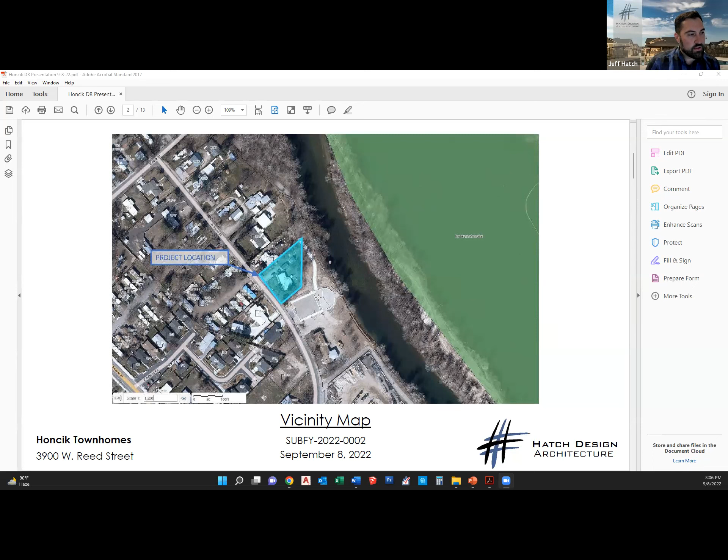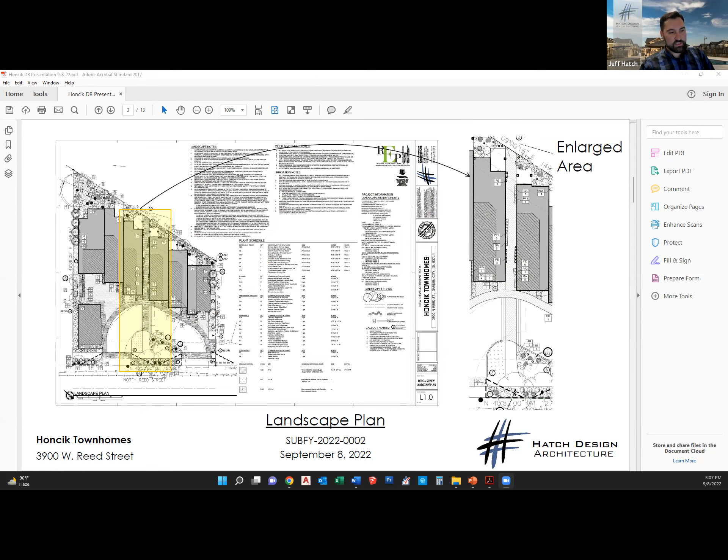So we have the orientation next to the public park, we have the river frontage. Looking at our revised landscaping plan, we have enhanced this walkway, adding planters and buffers along the way to help encourage pedestrian activity towards that space, as well as enhancing some of the amenities at this location, our common area.

So you can see that slightly enlarged here. In that location, what I was just recapping was, we actually look at connectivity to the existing sidewalk of the park. That location is interrupted by a range of different utilities, from electrical to emergency services and other meters, a power pole. So to be able to connect that sidewalk, there are some very valid reasons why the city didn't put in that public sidewalk at that location.

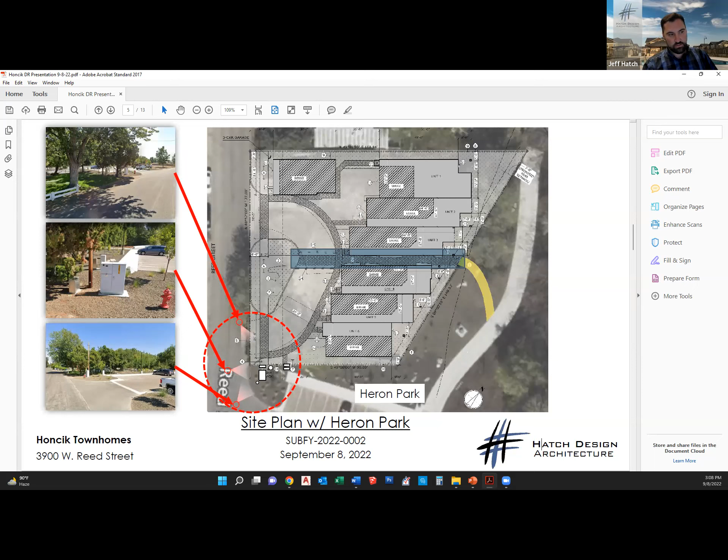So if we look at, okay, how are we going to connect this sidewalk into the park? If we go a little further south, where we have our public bike parking and some bike parking here, we still have additional meters over there. So we're actually pushed even further into the site, which led us to think, if we're having to engage the site halfway through anyway, in order to engage people with the park, the owner felt it was prudent to adjust the site layout, accentuating and centralizing it to the center of the development, creating a focused, intentional access to Greenbelt, and also for the general public to enjoy that parkway.

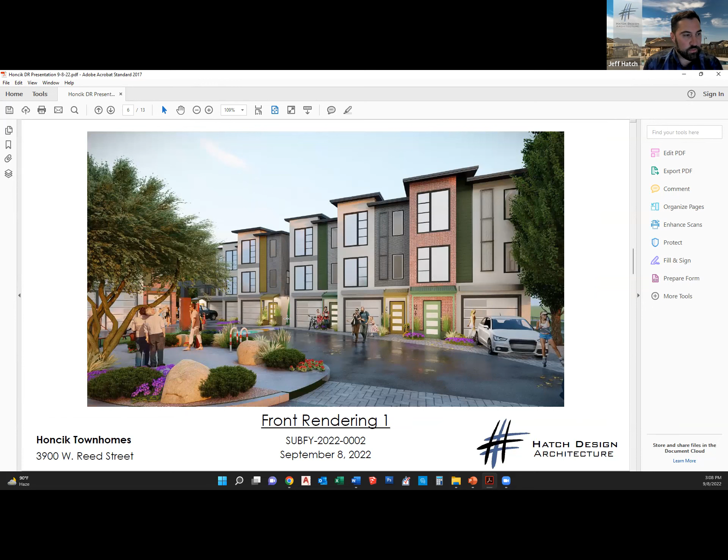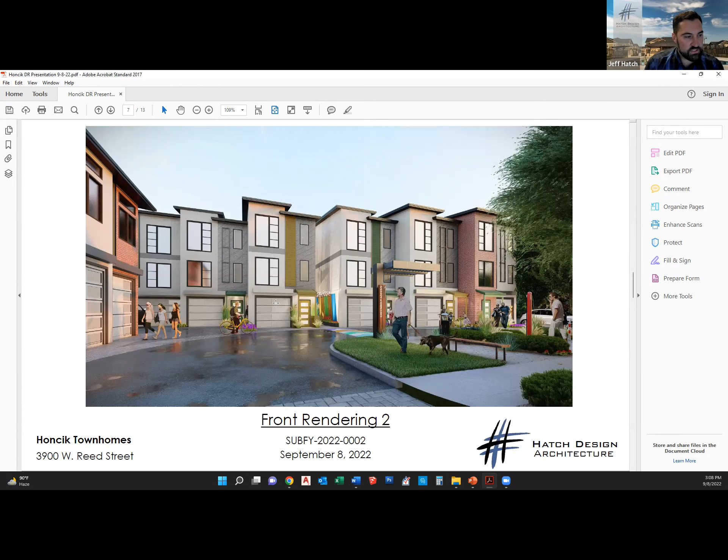So looking at some of the enhancements we've done to help encourage and engage that, we've added a pedestrian access signage with an entry arbor, which calls attention and engages individuals into understanding that yes, this is a public access, this is intentional, this is the way to go. You don't need to walk through the utility meter box tree forest to try to get to the sidewalk. We've engaged and made this much more functional, purposeful access to Greenbelt.

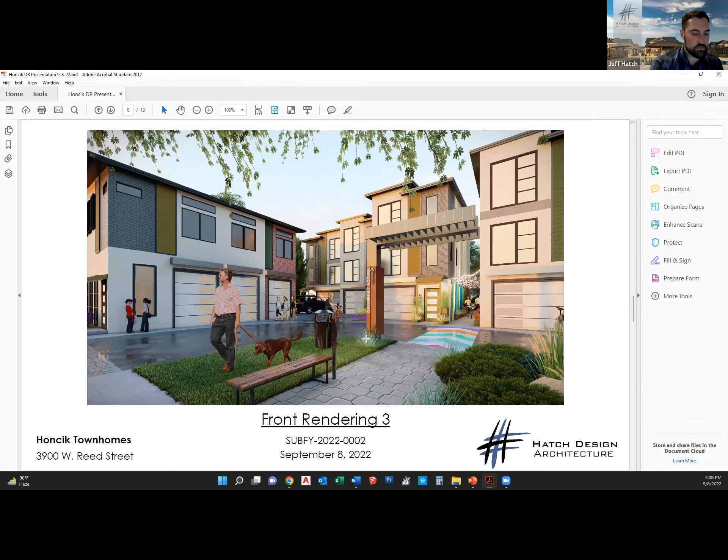And then with that, we've added a little bit of our artistic intention of directing people to go that way again, to try to engage and make it intentionally inviting for people to clearly be able to get there. So here's a screenshot looking through, seeing that space, walking through to the green belt.

And then, based on the staff report, we just wanted to speak to a couple of different comments and considerations. There was a comment about units greater than 30 feet in height needing aerial apparatus. In talking with the fire department, we did widen our walkway to the 26 feet needed for the aerial apparatus. We would also be proposing fire suppression, which also alleviates some of their concerns.

There's a consideration of some of the curb widths needing to be reduced in size, and the annotation for the final plat. We're fine with that condition of approval. Here's just our follow-up with the fire department acknowledging that they're okay with suppression in that.

So this is a reiteration from our previous coordination. There are some considerations for the preliminary plat as far as labeling and also dimensional tolerances, which we would be in agreement with those conditions of approval. And then indication of the bike parking, which I previously spoke to, is the keynote.

Some of the vegetation needs to be clarified, which is now in these renderings. There was a site deficiency in enclosed parking, which has now been revised since we had no carports on the site at this time. There were some questions as far as our tabulation for landscaping.

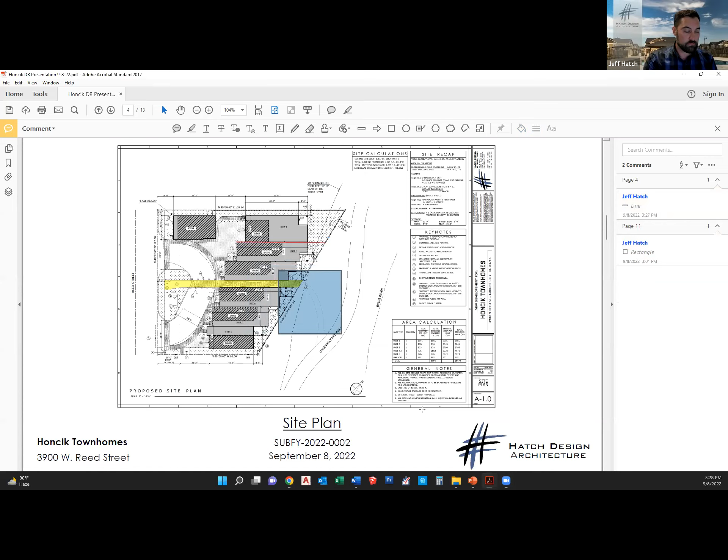Okay, thank you. And have you spoken with the adjacent property to verify that connection to the greenbelt could be granted? As far as this location, yes. At least our initial discussions with that entity were, after you have something finalized for approval, we can determine exactly how that looks for that access point. So it was favorable, but as far as a formal agreement, we wanted to make sure we all had general approved buy-in for this proposed solution. Then as a condition of approval, we would request that we formalize that.

It's a great comment, thank you. And then it's been brought up, the purposes of the planned unit development. I was hoping that you might be able to articulate how this application is meeting the purpose of the planned unit development for the waivers that are being requested.

I can help out if you need the code section, or I can generalize it. The purpose very generally states that the planned unit development is utilized to increase living choices, to preserve open space, to preserve items of note such as trees, vistas, etc., and to be in harmony with the comprehensive plan.

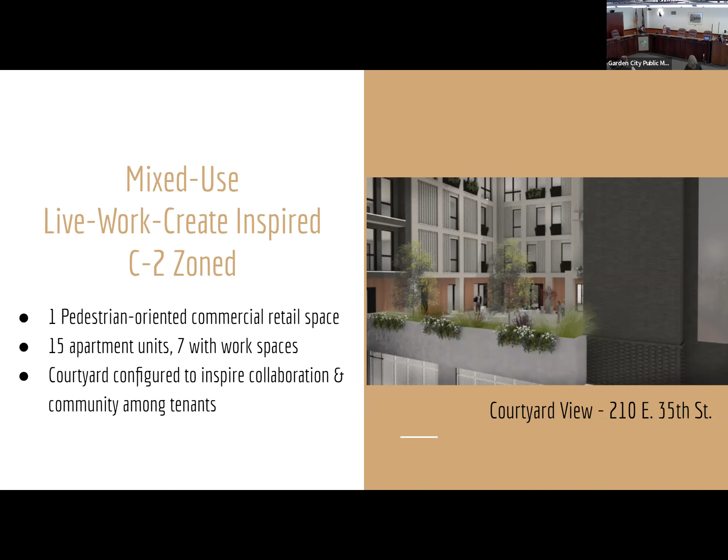It's also important for us to say at this point that Matthew and I are not outside developers just looking to maximize profits from this property for investors from afar, but this building will be our home. Our family of 4, plus a tiny, crazy, cute little dog, will live in one of the 15 apartment units. And we plan to use one of the courtyard level workspaces as our home office and art studio.

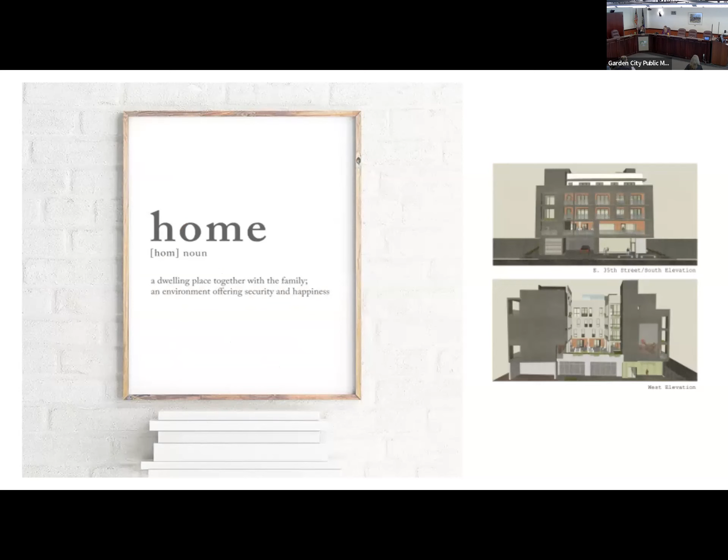A little over a year ago, we identified and purchased this property for a few primary reasons. We're very aligned with the stated intentions of this neighborhood, including growth, density, diversity of housing, and artful placemaking. We really believe in the creativity and sense of community fostered by the Live Work Create district. There's also no limit on building height, no limit on density, and no objective parking standards for mixed use projects. We saw this last item in particular as a selling point for our investment in the neighborhood and our commitment to making it our home.

We know that our community is growing quickly, and included in that growth are some people looking for ways to reduce their reliance on cars and looking to live with neighbors that share that intention. Both Matthew and I have lived without cars in other cities for many years, and very happily, and we're looking to create that possibility for ourselves and for others here at home.

Garden City and Boise City are working to revise their development code, including parking standards, to better accommodate healthy growth while also allowing for greater density. We understand that's a tricky process, but there are a number of new tools and proven ideas available to us to address parking in a modern mixed-use development.

So we've designed this mixed-use project to be fully compliant with Garden City Code and aligned with the comprehensive plan. We believe this fits beautifully within the larger stated vision of Garden City: a thriving, safe, and diverse community nestled by the river in the heart of the Treasure Valley. We are at heart community-focused neighbors and advocates of vibrant, creative, artistic communities. We really admire Garden City's ability to continually innovate and reinvent itself, and we're excited to become part of this neighborhood.

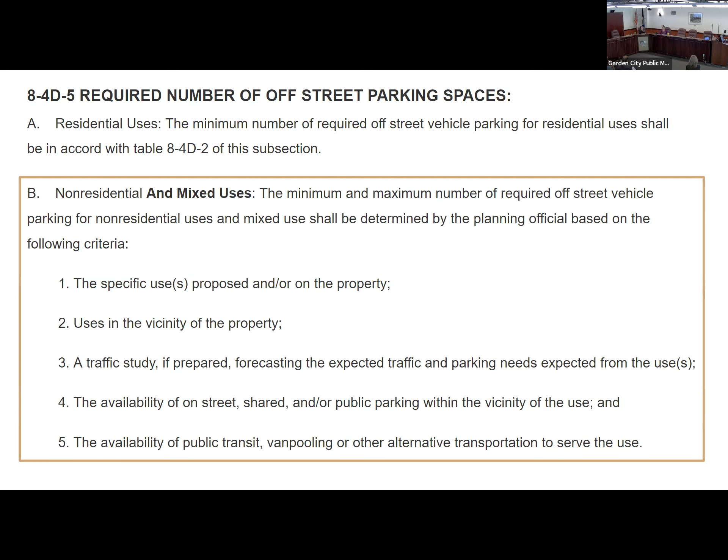Lastly, the availability of public transit, van pooling, or we think most importantly, other alternative transportation to serve the use. So in addition to the 17 covered parking spaces, the Sonder will be less than a quarter mile from a bus stop. We'll have at least 34 bike and scooter parking spaces, and we'll have this dedicated shared vehicle on site.

We understand that actual mixed-use development is relatively new to the area and that the car share program hasn't been seen here yet. But the Sonder justifies its parking plan under these subjective guidelines, while also addressing the standards for alternatives to on-site parking, including transit stop proximity, incentives, and shower facilities.

It's also worth mentioning that the staff report makes reference to a parking formula for commercial space that doesn't directly apply to mixed-use buildings, including live workspaces. But more importantly, we'd like to clarify that the workspaces at the courtyard level were designed for use by residents of the building, not people driving to the building, renting it just as their office from elsewhere.

The live-work overlay clearly states that no off-street parking is required for working spaces less than 500 square feet in interior floor area. So knowing that the parking requirement was subjective, but that there was an established metric, we designed our project to meet the standard of workspaces under 500 feet.

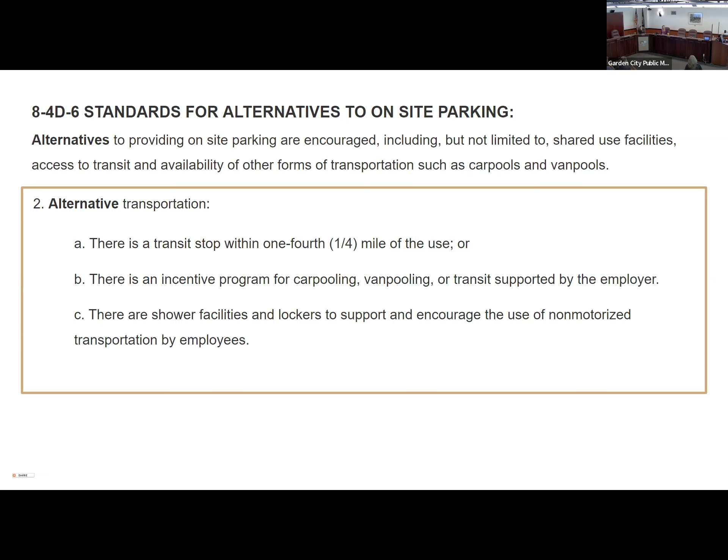Again, this project is a mixed-use building, not an exclusively residential structure. But for the sake of clarity, according to this definition, the small pedestrian-oriented retail space in our design is the main entrance. So we expect that even something like a coffee shop will see an average of more building users per day than the 15 apartments.

That said, in response to the comments we got from our pre-app meeting, we have designed the other two entrances, one for residents and one for occasional visitors to the courtyard level workspaces, to both be clear and inviting.

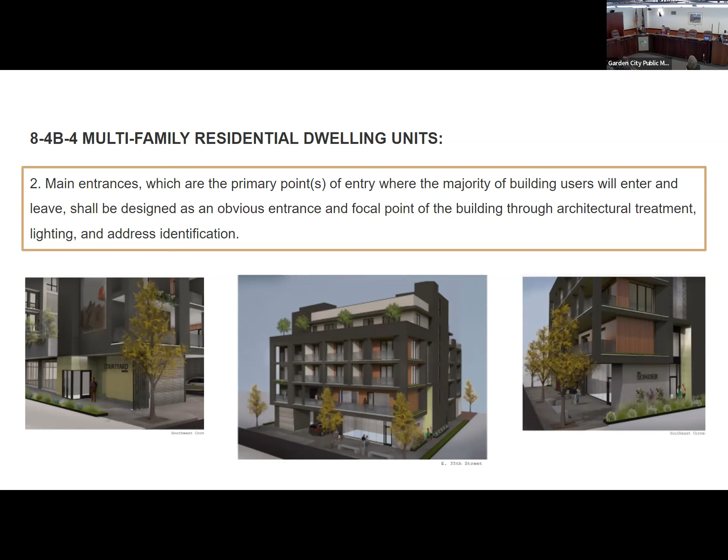We would also like to say that we know that a few letters have been submitted in opposition to approval of our project, and we know that there are some folks here today to share some thoughts. We're grateful that our neighbors are engaged and willing to express their opinions about growth in the neighborhood, truly. We also see that every one of those letters submitted focuses on parking, but none of them mention this car share program because it's not referenced in the staff report.

We hope that better understanding the way we intend to live in the neighborhood, including use of a shared vehicle, will help to allow different perspectives to share space in Garden City.

We named this building the Sonder for a very specific reason. Sonder is defined as the realization that each random passerby is living a life as vivid and complex as your own. Bree and I are deliberately choosing to build our home in a way that allows us to share space and to interact with 14 other households in the building and hundreds more in the neighborhood.

We hope that in that process, we all learn to better understand the variety of vivid and complex lives that exist in a community, many of which are different from our own.

Lastly, we want to reaffirm that our project meets the findings required for the design review committee to approve our application. So to do that, I want to invite Kathy Sewell to join us as well, please.

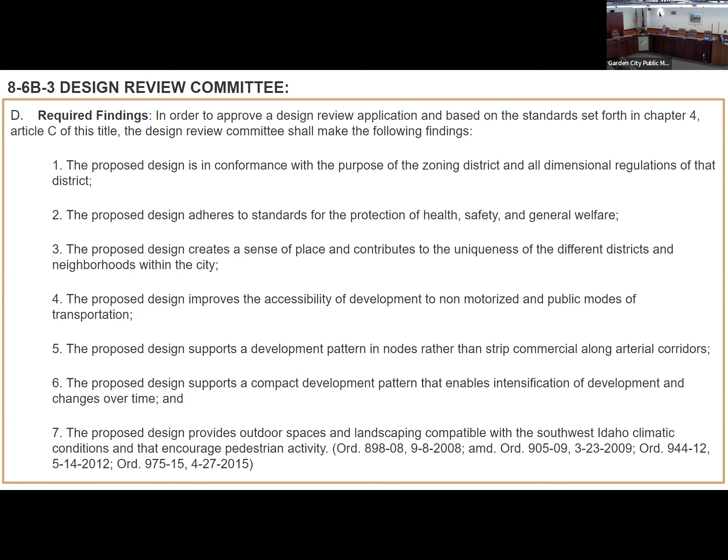But aside from that, we know the public's going to have some comments. Ms. Veal has a staff report, so we'll just wait to finish our comments during the discussion period.

Unless there's some questions right now. Any questions for the Sonder team? Not at this time. Thank you.

Ms. Veal, I'll turn it over to you for your staff report.

Previous discussions with the design review committee included the design of the work and live spaces in relation to the public realm. The applicant has updated site plans to include additional design features and signage to help show where the entryways are for both the courtyard and the residences.

Staff has kept the Garden City Code analysis of 8.4b4, which the applicant did mention earlier. I've kept it highlighted to indicate that further discussion should be had or might be necessary, based off of the pre-application discussions, at least in regards to the design and orientation of the structure.

I had interpreted this section of code with the understanding that the residential units are the primary use of the project, not that the commercial leasing space on the first floor, or even the courtyard spaces, would act as the primary uses. As such, I interpreted the 84B4 section of code as requiring the primary entrances to face the residences and not through that commercial space. That's why portions of that staff report analysis are highlighted and bolded in the staff analysis.

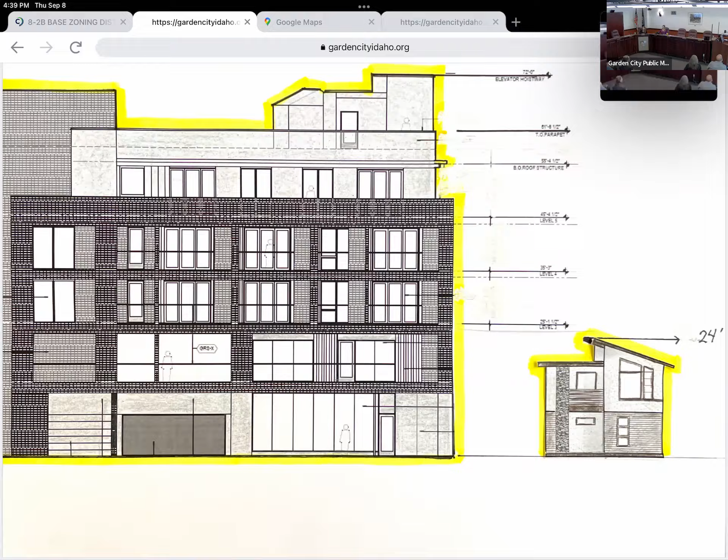Hey, I figured I might as well speak since everybody else did. So I just want to get into the code piece of this, since I think the parking stuff is still coming up and there's some confusion. Can I share my screen? Let me see here. Can everybody see what I'm sharing? No? Did you hit the screen share at the bottom? Let me try again. Share screen. Start broadcast. All right, can you see me now?

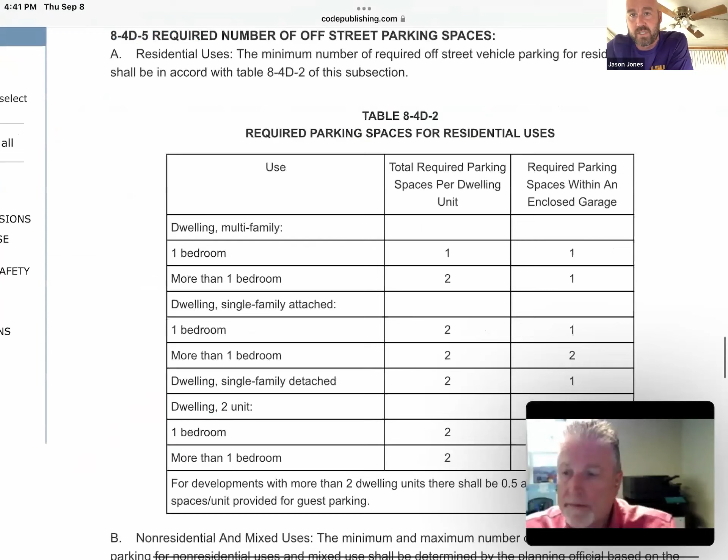Okay, so I want to make sure it's clear that this project is a mixed use project and that there are very specific standards for those mixed use projects for parking. There's two sections of code for parking in Garden City's code: one for residential uses only, and one for non-residential and mixed uses. I think if you look at the section of code, this is obviously a mixed use project. I don't think anybody here has denied that it's a mixed use project.

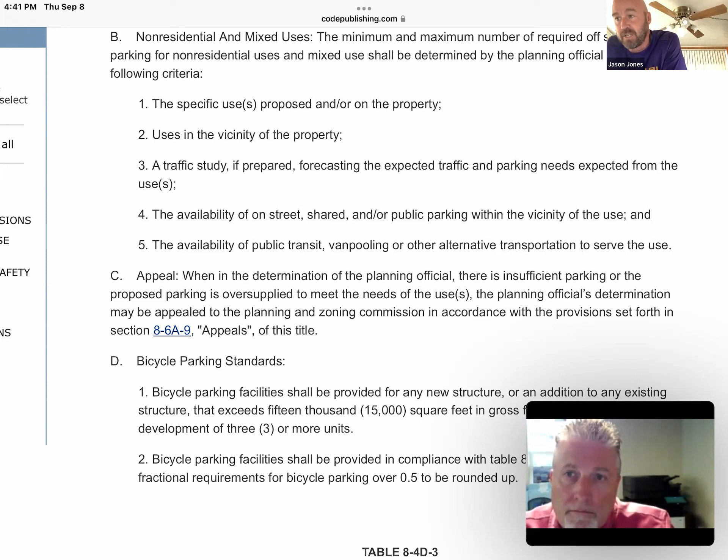And so the reality is, if you look at it, it basically says the parking is going to be determined by the planning official based on a whole bunch of things here. There's a list, but there clearly is no objective standard to that parking. It doesn't say you're going to have one parking space for every 300 square feet or 1,500 square feet. It also doesn't say each residential unit is going to have half a guest parking space or two.

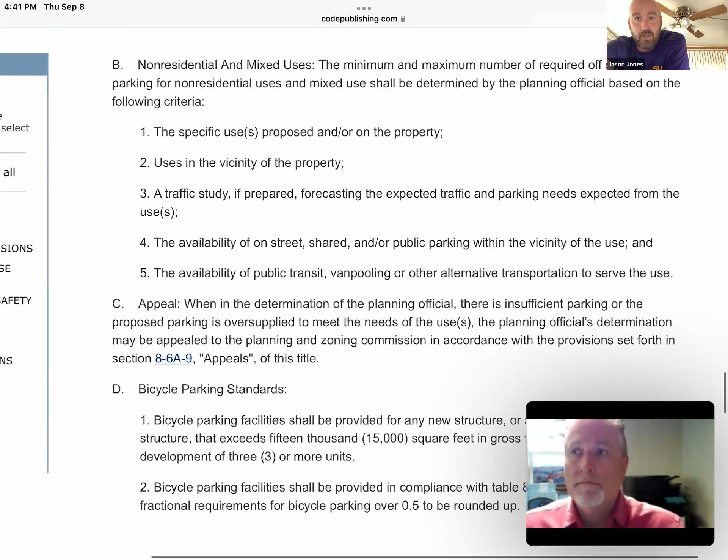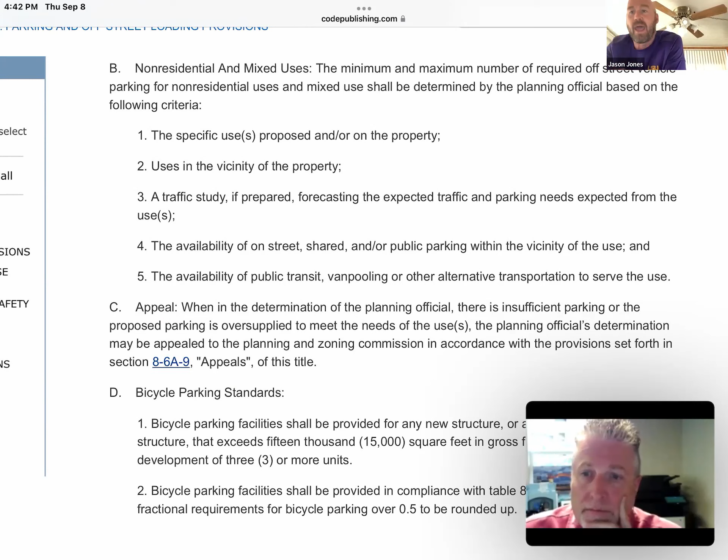I want to make sure it's also clear to the design review that this already went to court, and a judge said that the city can't enforce this after-the-fact determination. Since it looks like this is going to go to city council, I think it's probably a good point that the city would include that document as part of this hearing, so it would be on the record, so city council could see that a judge said they cannot delegate to someone else to determine what the standards are on a development-by-development basis, and that there has to be a clear standard if you want to enforce parking code.

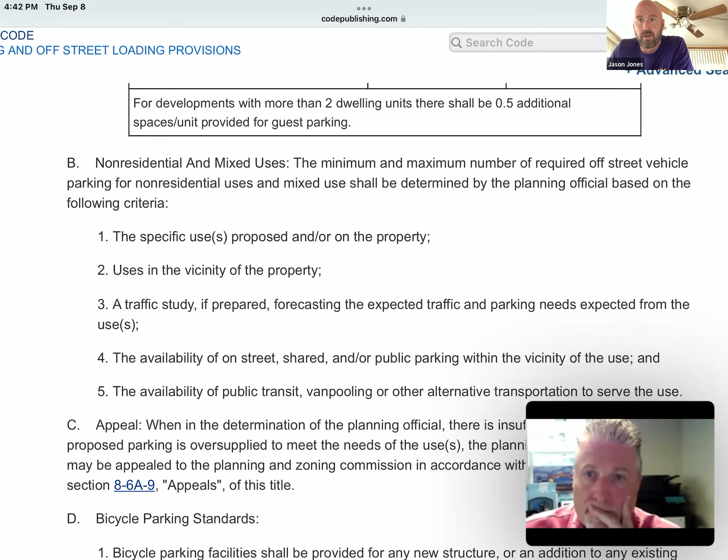And right now, this as a mixed use project, the parking code is literally on a case-by-case basis. There is no specific parking code for mixed use. I think it's important to make sure we're clear that you're not looking at this residential code, because this actually qualifies as Part B.

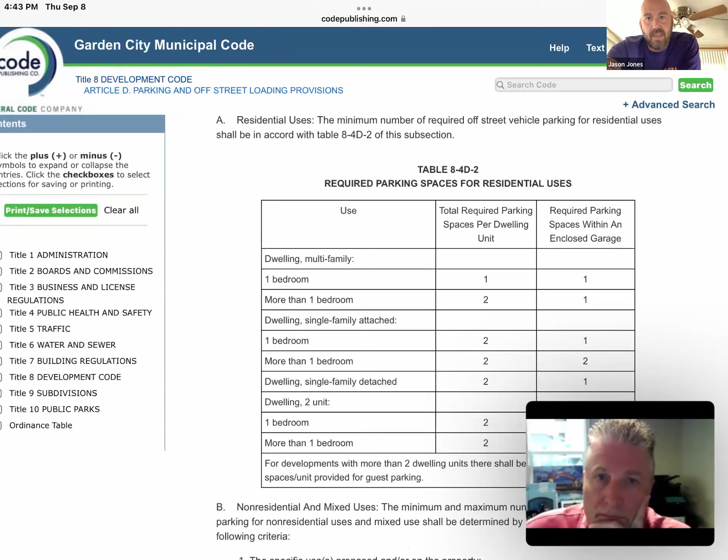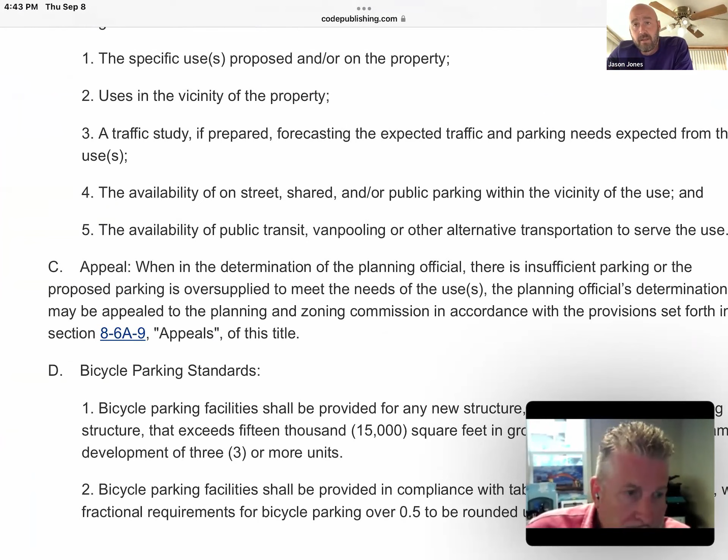Having said that, I know there's obviously a lot of tension over where the parking is going to be and whether it's going to be on the street. But I think the bigger picture here is that part of the reason the city had this mixed use section separately is to encourage mixed use projects where parking could be waived when people can just walk to where they work. I know there's some argument about whether people will live and work on that site, but I think it's irrelevant anyway, because if we have more workspaces in this neighborhood, it benefits everybody in the neighborhood. There's more possibility for you to actually live and work in this neighborhood, even if it's not at the same site. That's the reason for those reductions in parking.

And that's always been the purpose of it. Like I said, if this design review thinks they can deny this based on parking, it's going to get overturned in court if the city council agrees with you.

So it makes no sense to me to keep pushing something that's already been decided. There seems to be some confusion about what should apply, but I want to make it clear: none of the parking stuff in the staff report applies here. Staff by code has a right to determine it, but I believe that right to determine it has now been ruled illegal by a judge. So if staff thinks they can decide it and enforce it, that's going to be problematic going forward.

I just want to point that out, because I don't want you guys to get into a situation where you're basically getting sued again for the exact same thing you got sued for before. It doesn't make sense to pretend this project doesn't meet the parking code, because there is no parking code for mixed use projects. It's determined case by case by the planning official based on certain criteria, but that has been ruled illegal, so it can't be enforced. I just want that on the record so we're all on the same page going forward.

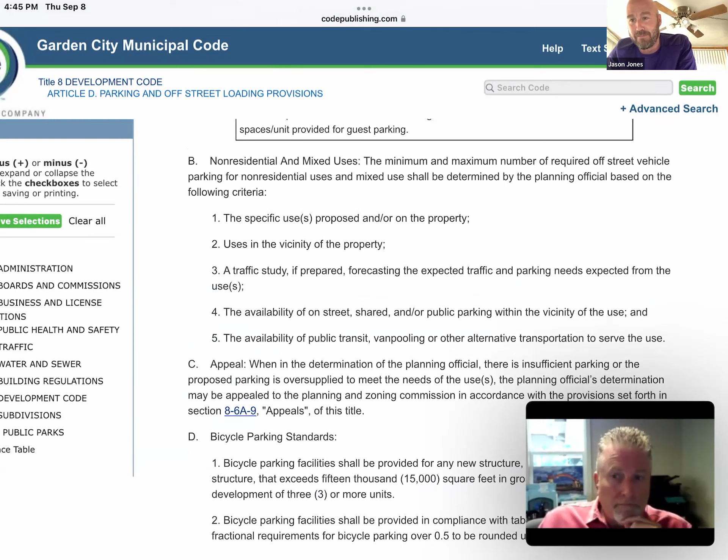Any questions for Mr. Jones? Any other individuals wishing to provide testimony?

I will. Belinda has her hand up again, but I know she already spoke. You have a question for Jason? Could you please do that offline, since you've already provided your testimony, as has Mr. Jones.

And with that, I can turn this over to the applicant for any rebuttal.

Kathy Sewell with Platform. First, I want to address Ms. Olkenstein's comments. To be clear, per Garden City Code for residential, 1 bedroom units require 1 parking stall, anything over 2 bedrooms requires 2 parking stalls. Our project provides 17 parking spaces for 15 residential units, so each unit has 1 parking stall, meaning everybody can bring their car to the site.

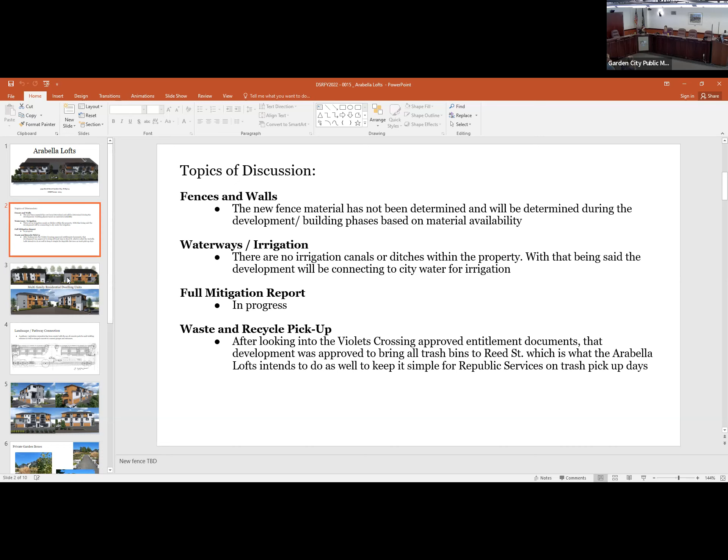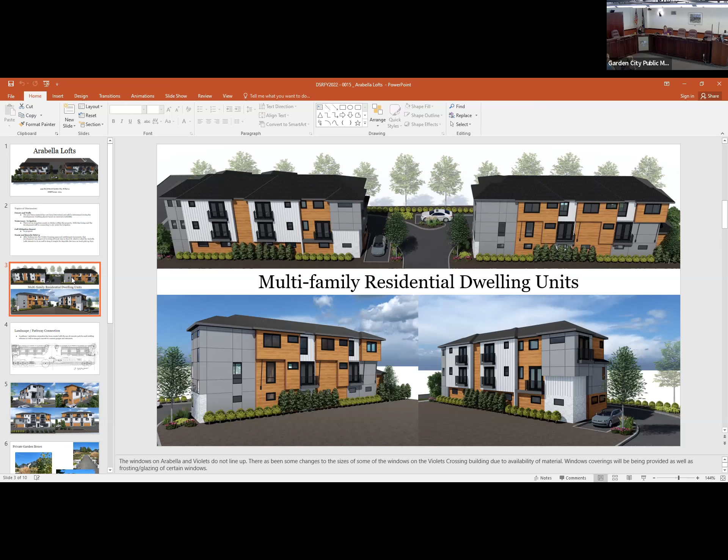Just to touch on the windows - I know it was talked about that they're looking directly into the back of Violets Crossing. As Violets Crossing is being developed and moving into construction phases, they have also looked at some of their windows, as we have too, and it does not look like their window plan lines up with ours. I'm more than happy to pull up those windows with that architect as well. I don't have their updated window plan, but I do know it was looked at and the windows do not look into each other. Some of them probably look a little bit, but none are fully directed at each other.

Our landscape plan, we updated that as well. We were deficient 2 trees, which we have added to the front of the development.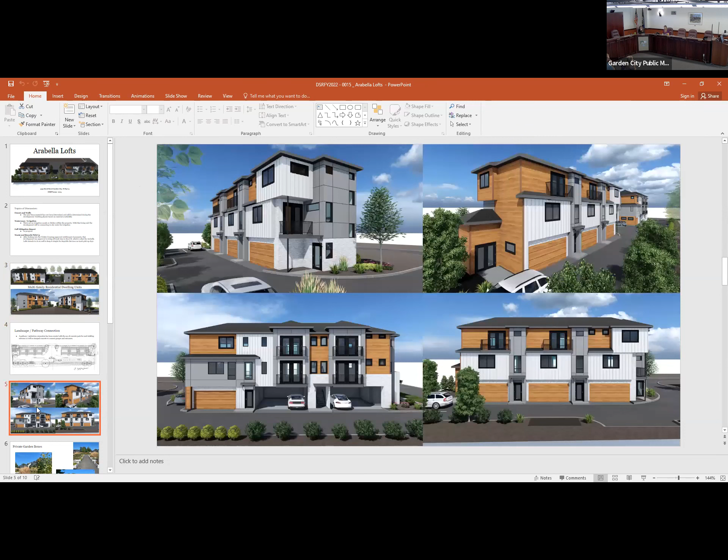This shows our stamped concrete path in front of the garages to each of the entrances to the buildings with awnings over the front. I don't think our first elevations showed awnings over it, so we do have awnings over each entrance to show they're direct entrances into the units and into the stairs that go up to the 1-bedroom units.

It was also noted that our private garden beds may not be sufficient to make up for the lack of private open space that we have on 3 of our units. But I did walk a couple subdivisions and found that private gardens with unit numbers on them are utilized by people. So I figured it was a good way to show this, and that we were able to only need them for 3 of the units and not all 8 of them.

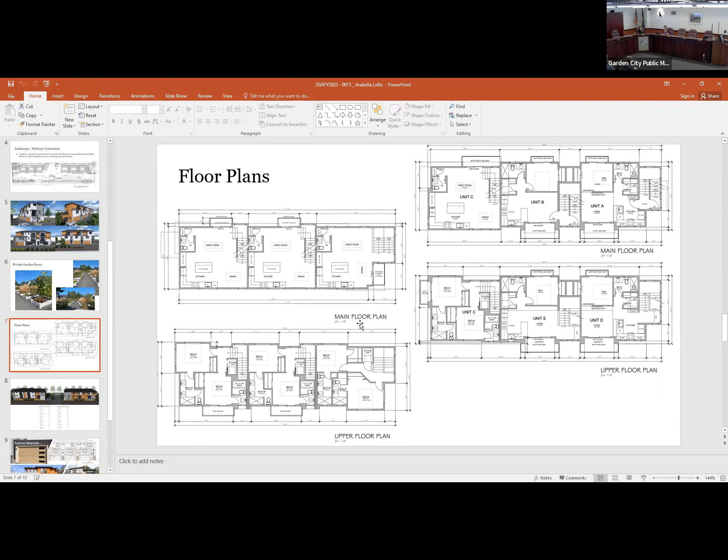This is just our floor plans that were already submitted. These show our enlarged decks in these front areas to make that 80 square feet of private open space. It was also noted that square footages were not included in the plans. I do believe they were included on the floor plan pages, but I've included them here as a reference if you wanted to look back at them.

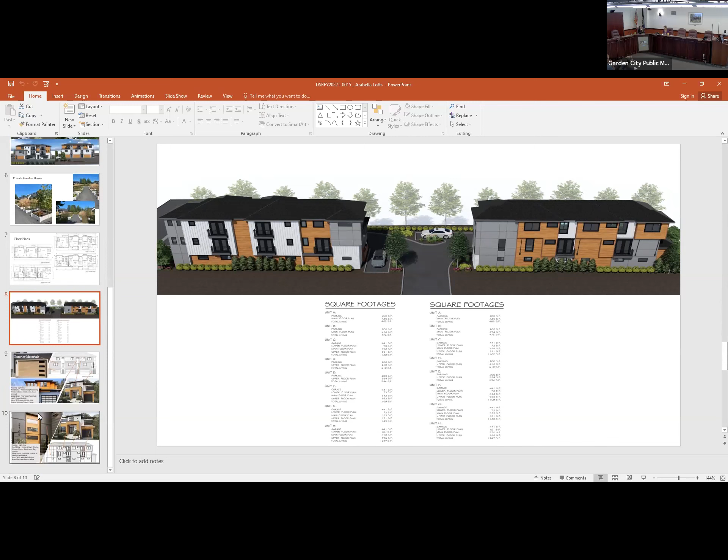As far as the elevations for material, none of that has changed from the pre-app. I'm not sure there were any comments on things you didn't like, except for the garage doors - you had noted you wanted to see something that wasn't as flat and plain. So we feel a garage door with maybe some windows or some type of texture would be sufficient.

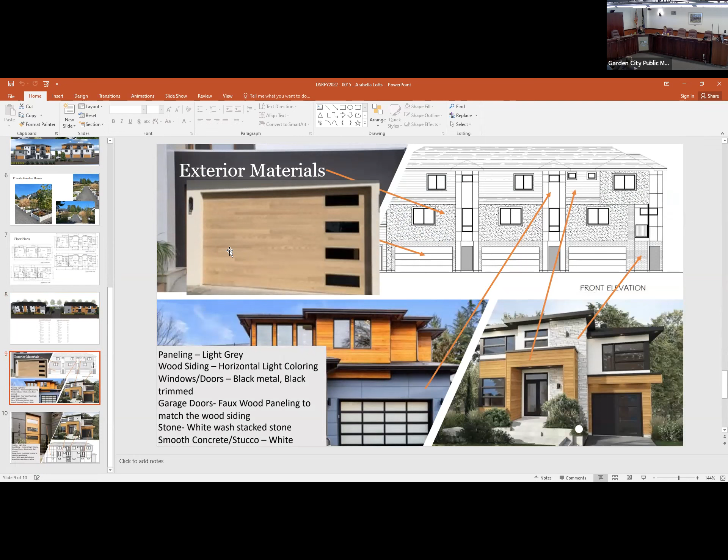Good afternoon, I will go through the staff report item by item as highlighted in the analysis. As far as the fence conversation goes, it is conditioned in the decision document to require code compliant fencing upon placement or construction of that fencing, so the lack of fencing at this point is not too much of a concern. It was noted in the landscape plans that there was fencing, and then that there wasn't, and there's existing fencing, so there was a little room for confusion, but it is conditioned in there. So during the construction plan review and final inspection of the actual subdivision, we as staff will go over the fencing, making sure it's compliant.

Garden City Code 84B4 speaks to the facades, the orientation of the structures, the windows, etc. Staff has noted that the front facade of that building closest to Reed Street has changed based off of the pre-application conversations, but it may not appear to address the street and the public realm as much as the committee would like.

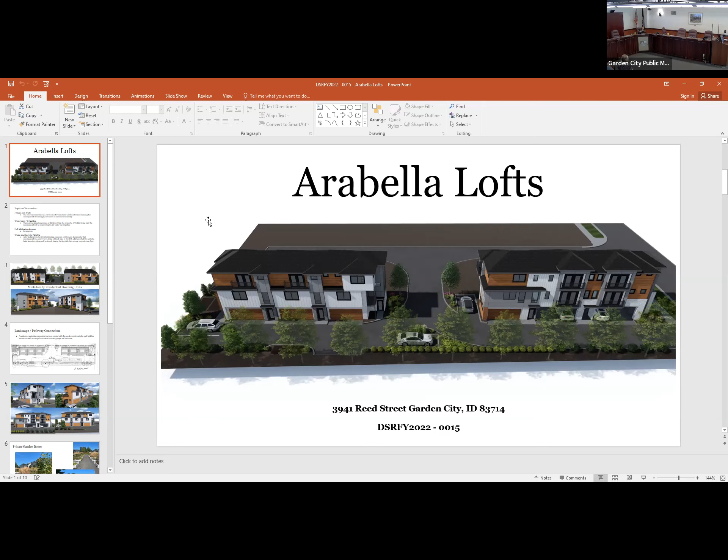Just to comment on a couple of points from the staff report: on the front facade facing Reed Street, I don't have the new rendering, but we do intend to add the name of the subdivision and some type of artwork so it's not as plain. That's why there's only one awning over that staircase, because in the blank space above it we intend to put the subdivision name. We just don't know what material that sign will be made of yet.

The pathway we intend to make a different color, maybe stamped concrete, something showing it's different from where cars drive. It goes into garages, and there are concrete pads that go directly into the unit. We feel a stamped concrete path or similar material will be sufficient, and we don't think a lot of people will be walking through the subdivision with the green belt so close. If they're going on walks or bike rides, they'll go over to the green belt rather than through the subdivision.

The carport spaces, we are willing to put garages on those and make them one-car garages, but we feel that carport look changes up the buildings a bit, and it's more aesthetically pleasing to see the two buildings be different instead of just garages on every single one of them.

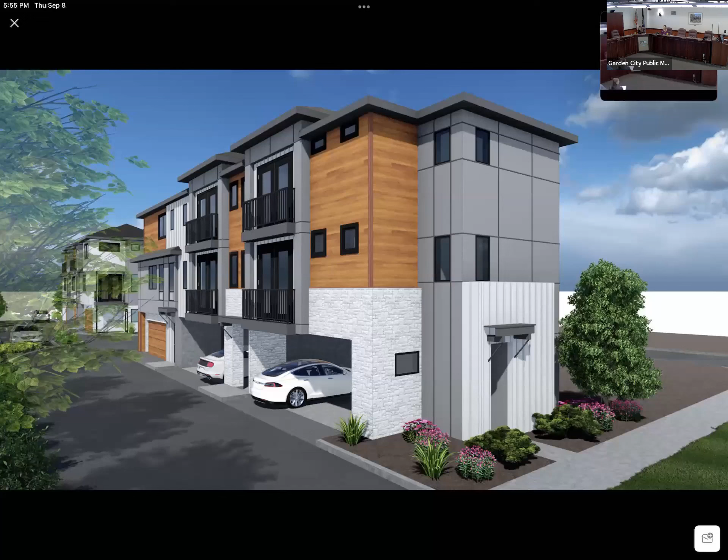And then this is the front facade facing Reed Street, and that's where we intend to somehow put the name up there. We're just not sure what type of material we want to put it on, but we do want to display the name of the subdivision there.

I really don't think that addresses the street - it's the lack of fenestrations in there. I think what I struggle with, I'm agreeing with you, Brett, but what I struggle with is that what does interact with the street is kind of like circulation space. It's not the eyeballs on the street that we talk about, that code speaks to how it interacts and engages, and you're connected to the street, connected to the public. It's almost like this is the fire escape in essence, right? It's just the circulation from garage to main living. It's a door and then you're immediately going to the stairs. It's not a living space in essence.

Would it be efficient or helpful if we added more windows to this portion and made it more of an open stairwell? I think it definitely needs some more attention - it still feels like a side elevation with an entry door.

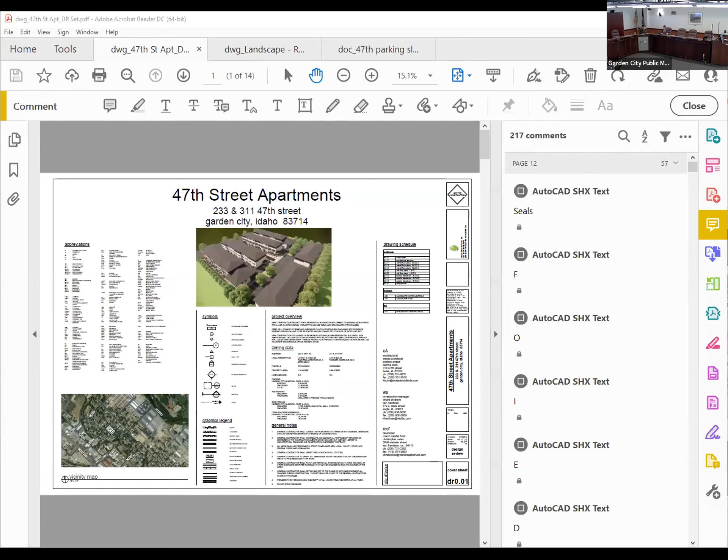All right, Katrina Colm with Erstad Architects, 310 North 5th Street, Boise, Idaho. We are here to present 47th Street Apartments. There will be 60 rental units on this 2-acre site. It's on 47th, just south of Adams Street.

We are hoping to fill a much needed housing problem in the area with professional work units. We feel this is a compatible use based on the residential area that is surrounding it.

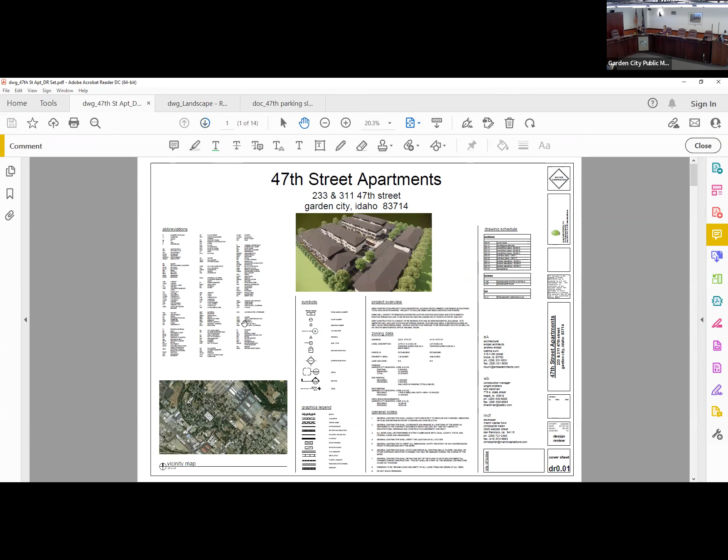Our site plan, we really focused the units very residentially. We made the front entrances face courtyard space and well-landscaped space on the perimeter, with garages on drive aisles as needed, as well as the parking in the back. We've tried to focus a lot of the amenity space central to all of the buildings that are on site.

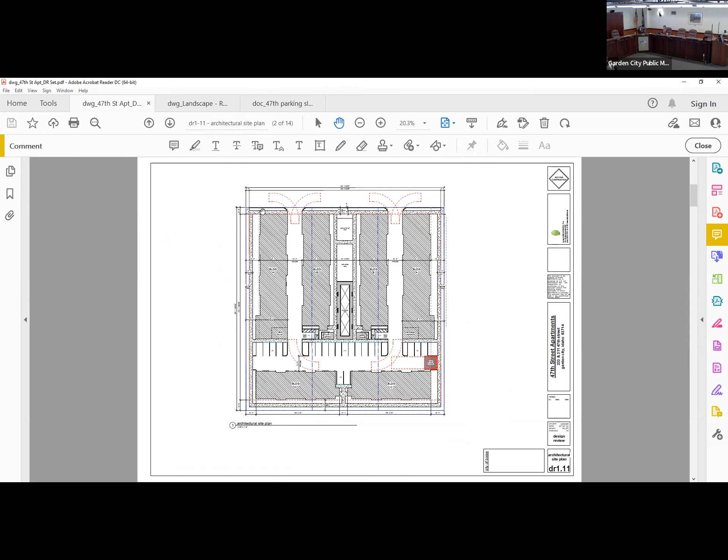The building masses themselves take the 2 units and start to push and pull that mass to really give those long elevations a lot of articulation.

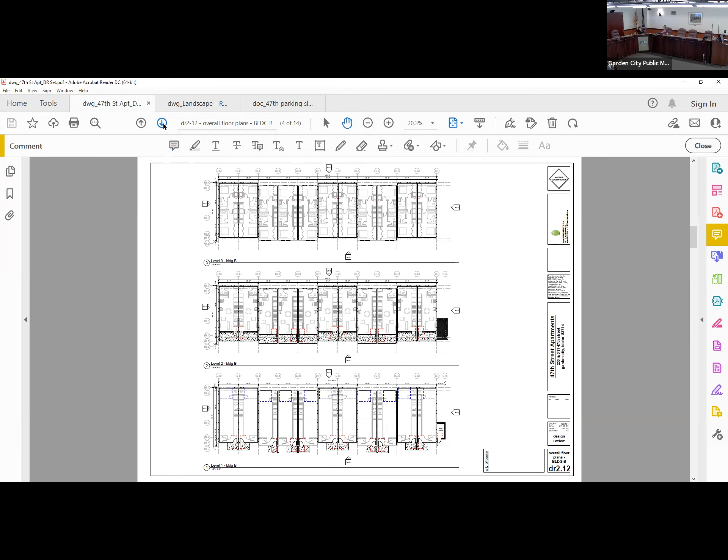And these are just the overall unit plans here. Again, there's garages on the first floor, main entrance on the first floor. You'll go to the second floor, which will have your kitchen living space, and your third floor will be your bedroom space. As you can see in these specific unit plans, we will have units that meet accessibility. So they are still a 3-story unit, but they will have a lift inside to meet those requirements.

Our elevations are going to be a mix of materials, very common to the area and the style of the area, where we'll have a masonry base, stucco. Some of the masses that step back will have the cement board, and then we're providing some wood accents on our balconies, as well as some of the headers for some of the windows. Again, you can see in this diagram here, the front entries, balconies, everything we're trying to focus inward to the amenity space or the landscape space.

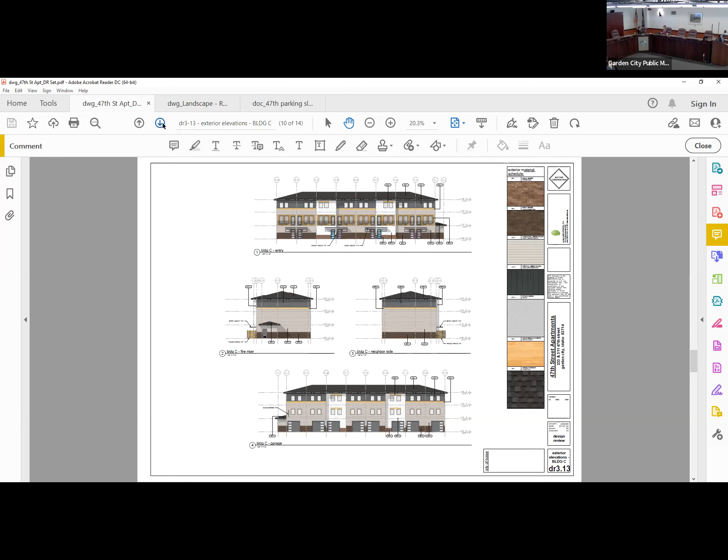As part of our application, there's an irrigation line that exists on this property edge here. And that is going to be landscaped as best as we can. It is an irrigation line. We worked with the irrigation district. We have the easement set that they want. They, of course, don't want any trees. And so we planted up closer to those units to provide that. But you will notice that we are deficient of trees in that landscape edge for that reason. It will also provide a buffer to the adjacent neighbors.

There was a comment in the staff report about connectivity to the main entrances. What you're seeing here is the architect's version of sidewalks, very straight lines, very linear. Our landscape architect's going to get in here and maybe do some meandering paths and direct connection to those front doors. What does that look like? We don't know yet, but we'll get there. We'll define that as we move forward.

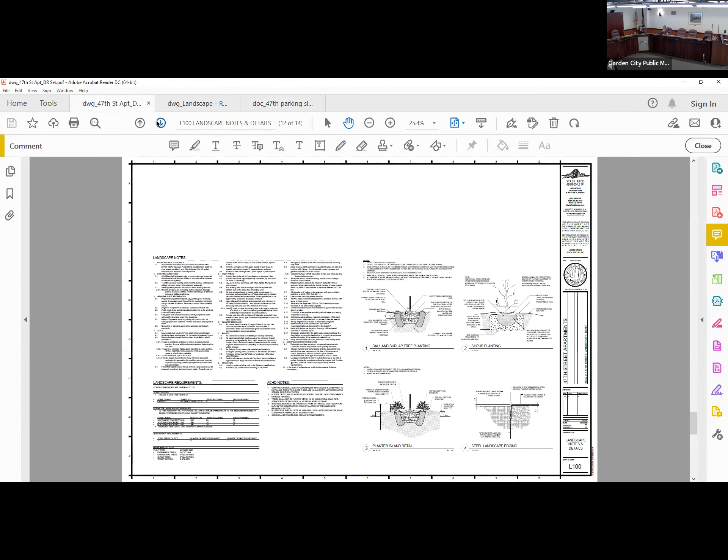Based on your comments, it sounds like you've already gone through the staff report and asked all the questions you might have related to it. We'll turn it over to the committee for any specific input.

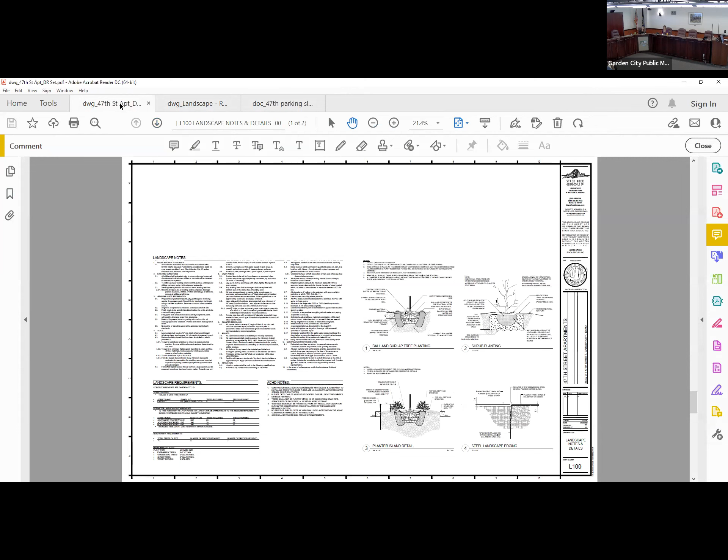Can you click through and let's talk about the street elevations of the units? This is 47th Street here. You're seeing the end of the units, but we did that intentionally to focus on courtyard spaces and landscape spaces. We feel there's adequate landscape adjacent to the sidewalk so it won't feel like you're walking against the end of a building, but rather a nice sidewalk up against that edge.

Yeah, I mean, courtyard space is great. I love bocce ball, it's gonna be super fun. I'm gonna come poach on the court.

But those end units need to address the street. If you have a courtyard, that doesn't mean you don't need to address the street too. I think what's often missed with developments like this, where multiple units exist and only one faces the street, is the opportunity to make that unit really cool and special, not just stick a door on it with an awkward way up, forgetting about the street. That end unit could be unique. So there's your challenge.

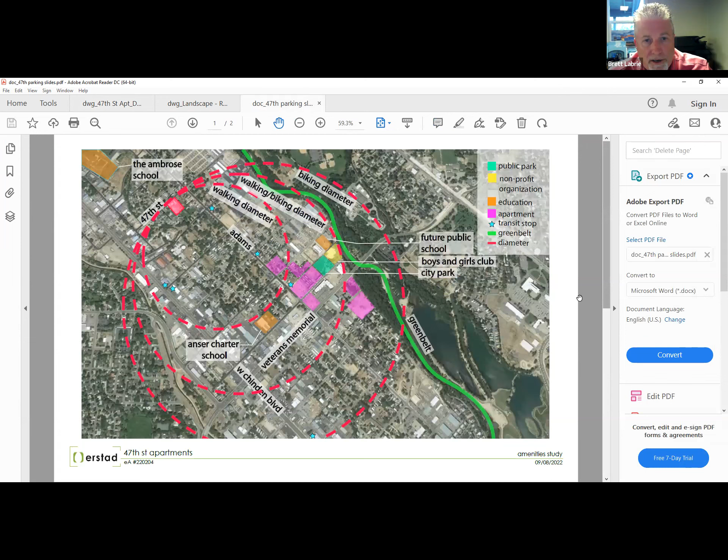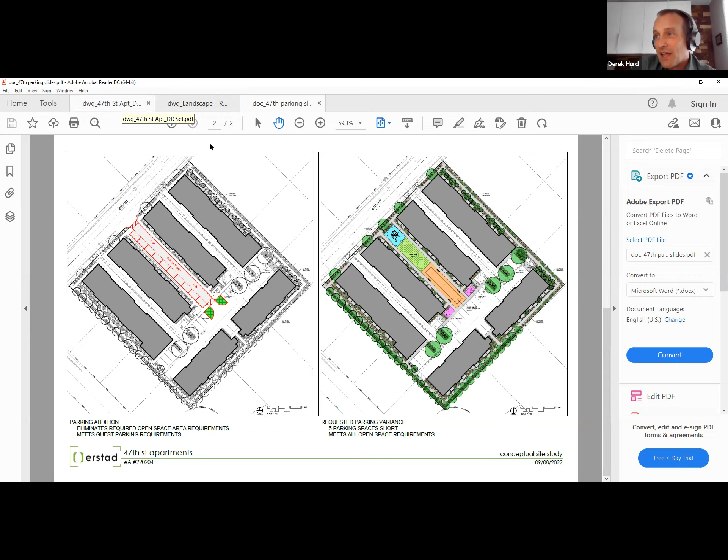I had a note about the terminal views of the actual drives and where they terminate into these end buildings. I think that's really important, what we see as we're looking down this long drive aisle. So address that, part A, and then part B is what Brett's saying, how do you address it down the central common area? I really like that.

I think there's a great opportunity, as Brett's suggesting, to highlight that center there. Maybe something we've touched on in previous applications is, is there an opportunity that drive aisle and parking becomes multi-use? Can that common area spine not only continue and accentuate the buildings on the end, but is there a multi-use sports court that is part of the parking, which engages people, slowing down cars in essence, whatever sport that may be. I could list four, but maybe play with that.

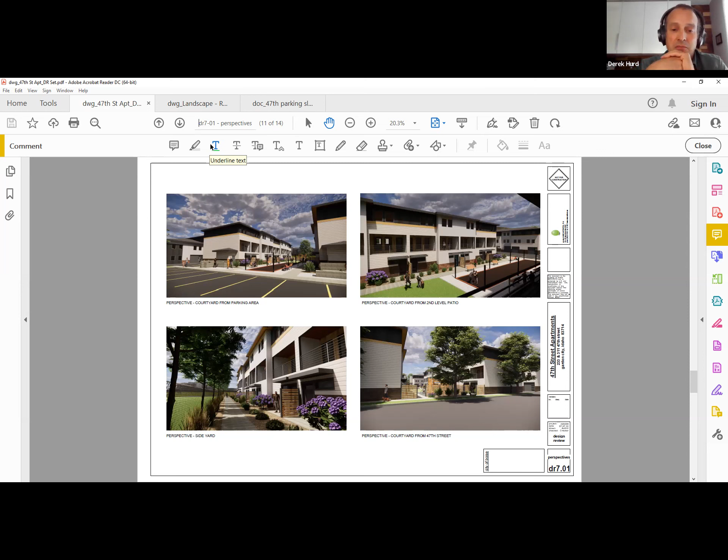So I think those are the big ones. Another sort of big one was lines. I see that there's the gables that are there to kind of break up the roof line, but I don't think they go far enough. It just seems like it's a token hip that connects to the main roof line, but given some distance, we still have this long, entire building long spine. So I'd say accentuate those hips, drop the, have a different fascia line, something to give that more depth of character.

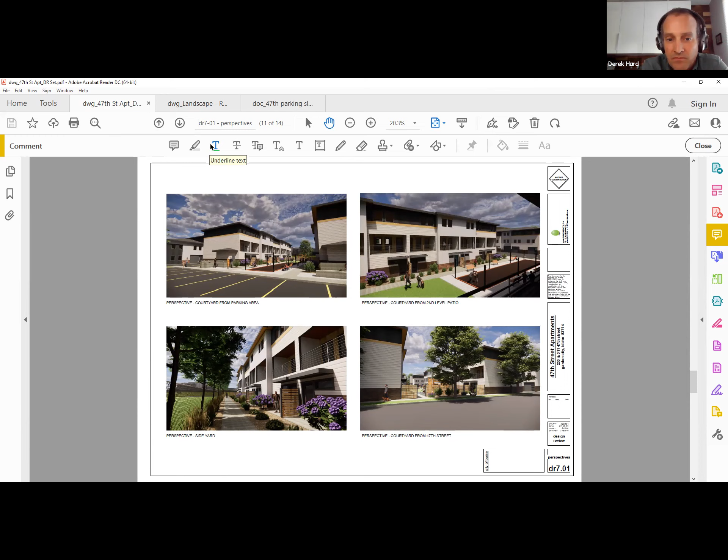We did initially play with gables on those ends and it just kind of, it was too disjointed, but we'll go back to the drawing board on that roof line.

And then just to touch again on the parking, which you heard a lot of dialogue about. If there is a parking reduction, why is there a parking reduction? What are you doing in this project that warrants less guest parking? Not what code are you pointing to that requires less guest parking, but what are you doing specifically that requires less guest parking? I guess that's how I'd put it.

And reiterate one point, sorry Derek, I didn't mean to run over you there. One point, I did notice that you looked at transit, that line has been removed, so it's no longer there.

And on that note, Jenna, I know this development is X units, and throughout the night we've talked about many more units, and there's hundreds of units on 43rd and Adams. What does it take to get that line back? Because we're referencing it often, but is it just a trigger number of people, is it a...

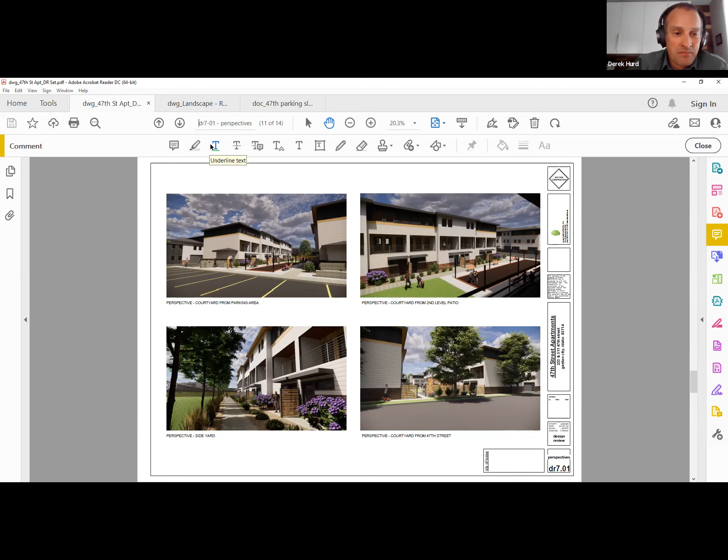And piggybacking off of the parking requirements and substituting parking spaces for bicycle and public transit, et cetera, there is the next application, actually right next to this property to the west. And so the staff report mentions the ability for these two developments to work together to create maybe more of a larger common open space on the adjacent shared property line, or creating a pedestrian bicycle pathway that could extend through the entire length of both of these properties.

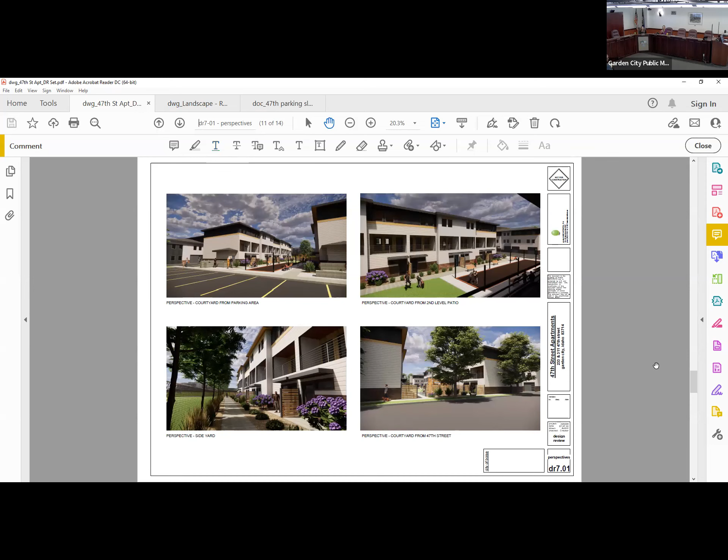That's great. We just need to do more exploration, because the diagrams that were sent to us, one of them didn't show, we have two parcels. So it didn't accurately reflect where the elevation is.

Just for the benefit of the committee members, I don't know if you can hear this since a lot of the discussion is going on outside of a microphone, but this application and the next application are having sidebars, and they are potentially willing to work together to create that connectivity. I just wanted to note that it is in line with the recent ULI recommendations too.

Although I do have an attorney looking at me, it's not adopted anywhere. It just wouldn't be a straight alignment, as long as that's clear. Because ours is coming down the edge of the property and then over to the others. So, okay, probably got myself into trouble, sorry.

Jeff Bauer, 601 West Bannock in Boise, here with the applicant team. I guess what we would say is that when we come before this body for our public hearing, we will have coordinated with the applicant next door and have proposed a plan to provide pedestrian connectivity through the block. We do not foresee it being a straight line, but we will have a plan. Thank you.

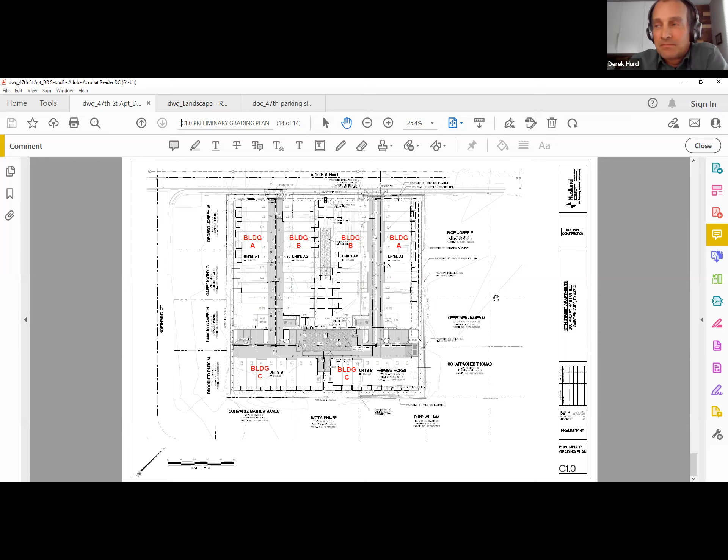All right, any other comments? I don't. Nope. And I guess we're probably out of time.

We do have 4 minutes left. Yeah, and I'll just say the glass doctor one, and I guess discussions and pre-apps can continue without me if that's the will of the other committee member. But that glass doctor one looked fine, and I don't know what deeper discussion we need on that, but if Jeff needs to get going on that one, you guys may be able to touch on it and address any high points, and we can push that one forward. Sorry to interject, I just wanted to get one more checkbox checked.

No, I'm also okay with that one. Okay, along those lines, just very quickly on number 15 as well, do the committee members feel that needs more discussion, or would that one be okay as well? It's the State Street reduction in glazing on, I think, 3 units. And that was the biggest thing about it, right? Was the reduction in glazing.

Thank you. Hannah just reminded me that there's also, yeah, so with the State Street townhomes, they are doing facade changes that they're wishing to change, and then the pedestrian pathway along State Street. Jeff has provided 2 alternatives for the committee to decide which would be the best one to move forward with.